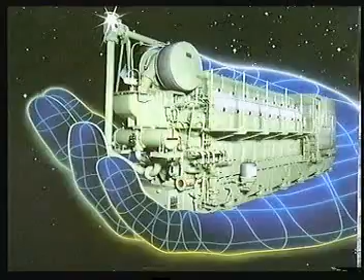This video shows how to overhaul the cylinder head, piston and cylinder liner. With regard to the dismounting and mounting of the components, please refer to the relevant instruction book or to the cylinder head, piston and cylinder liner exchange video.

This film shows how to use the tools which are available for the L28/32H type of engine.

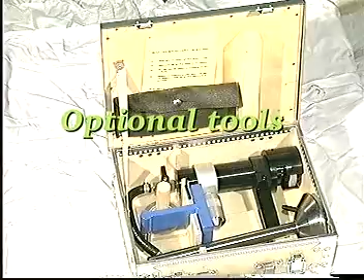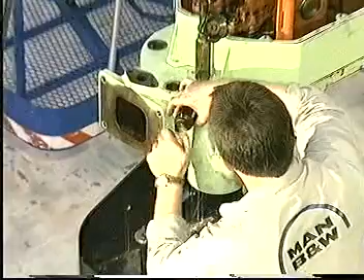Remove the scavenge air sleeve and the safety valve. For instructions regarding the overhauling of the safety valve, please see work card 605/01.25. The procedure for overhauling the indicator valve can be seen on work card 605/01.26.

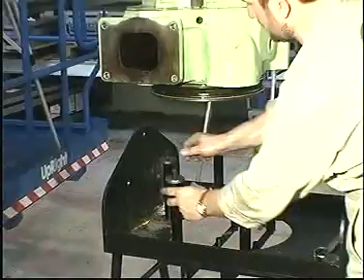Land the cylinder head on the work table. Make sure that the valve spindle supports have been mounted on the underside of the table.

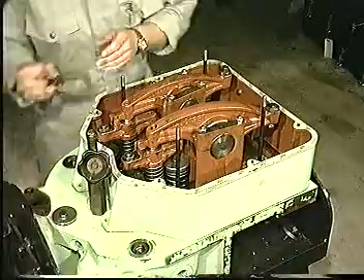Remove the cylinder head lifting tool. Screw the cylinder head firmly to the work table.

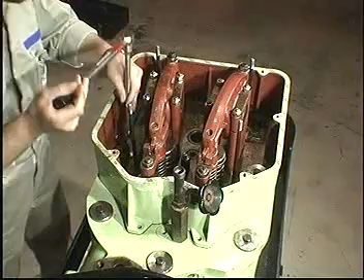Remove and discard the gasket.

Remove the valve bridges and mount the tool for compressing the valve springs above either the two inlet valves or the two exhaust valves.

Tighten the nut to compress the springs and then remove the cone rings.

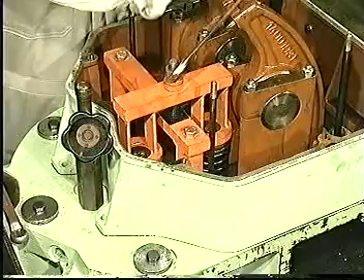Loosen the nut and remove the compressing tool. Remove the valve rotators and the springs.

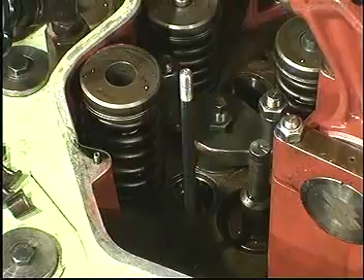For instructions regarding the inspection and overhaul of the valve rotators, see work card 605/01.15. Remove the cone rings, valve rotators and springs from the other set of valve spindles in the same way.

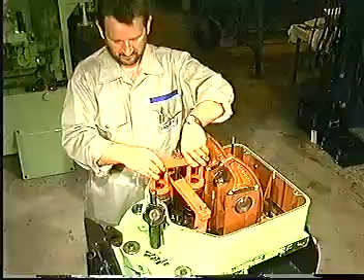Regarding the overhauling of the fuel valve, see work card 614/01.10.

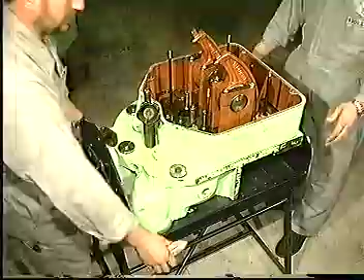Turn the cylinder head upside down and remove the valve spindle supports.

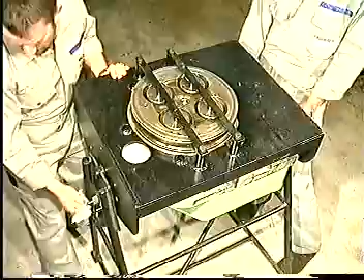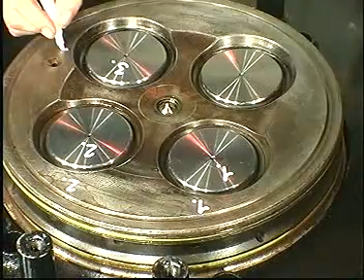To ensure that they can be rematched correctly, provide the spindles and cylinder head with numbers. Remove the valve spindles.

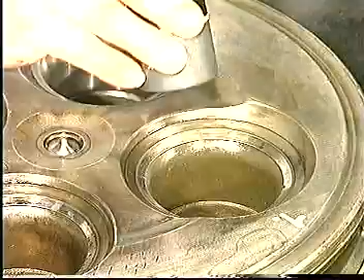Clean and check the condition of the valve seats and valve spindles. If the seats and spindles are badly burnt, recondition them. See work card 605/01.10.

Clean the valve guides with the special tool delivered with the grinding machine. Mount the grinding machine and grind the valve seats, following the instructions of the grinding machine supplier.

Grind the valve spindles in a turning lathe, following the instructions of the grinding machine supplier.

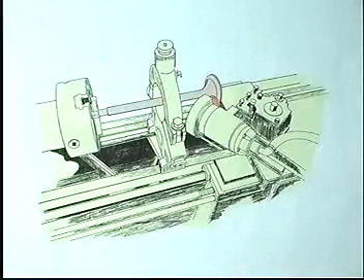Remove and discard the O-rings from the valve guides. To ensure the correct functioning of the valve guides, make sure that the diameters do not exceed the maximum limit.

Insert a valve spindle to facilitate the mounting of new O-rings. Insert new O-rings using another spindle to press the O-rings completely into the groove.

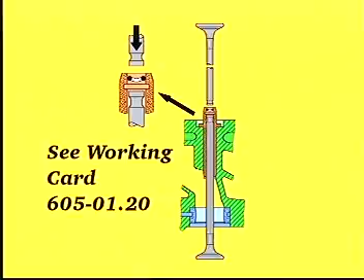Check the cooling water inlet bores and remove any deposits.

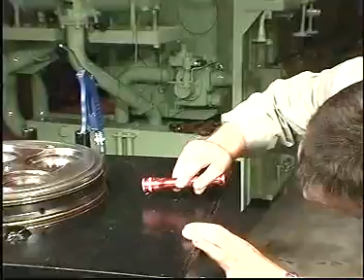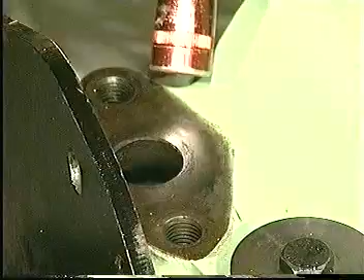Turn the cylinder head around and check the cooling water outlet. Pour water into the cooling water outlet and ensure that water flows from all the inlet bores in the bottom of the cylinder head. If necessary, clean and flush the bores.

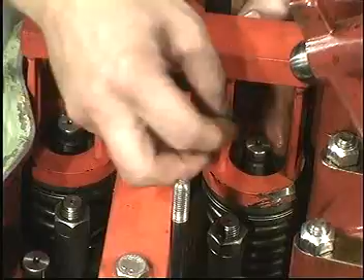Mount the inlet and exhaust valve spindles in the reverse order to the dismounting. Make sure that height H2 does not exceed the maximum limit.

Remove the valve spindle supports.

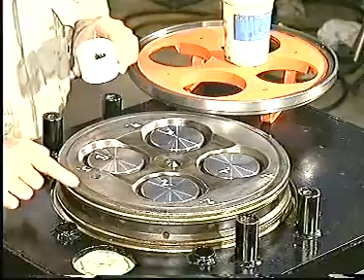Apply grinding paste to the sealing surface of the cylinder head. Move the grinding tool back and forth, lifting it from time to time so that the grinding compound is evenly distributed.

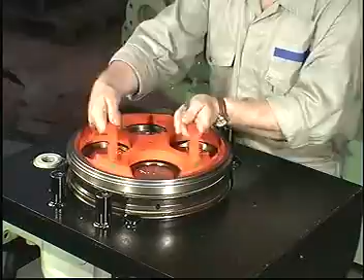After grinding, carefully clean the cylinder head. Measure and record distance Z so that it can be used for reference purposes when remounting the cylinder head.

Mount the valve bridges and remove the securing screws.

Mount the cylinder head lifting tool and lift the cylinder head.

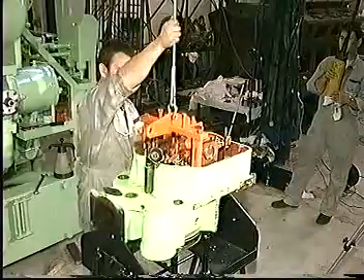Remove and discard the O-rings. Clean the O-ring grooves using emery cloth to remove any deposits.

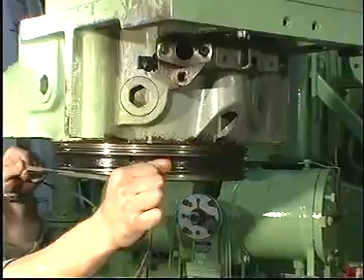Make sure that the cylinder head sealing surfaces are clean and undamaged. Lubricate new O-rings with oil and mount them in the grooves.

Lubricate the safety valve with Molykote or a similar product and screw it into the cylinder head.

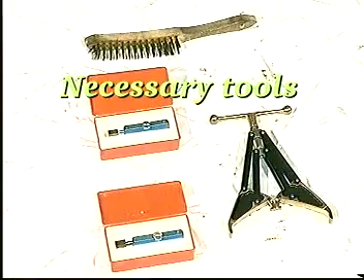Remove and discard the piston rings and the scraper ring.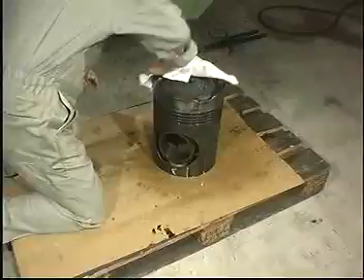Clean any deposits off the piston. It is recommended that a piece of old piston ring be used to clean the piston ring grooves.

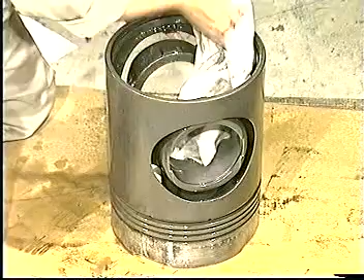Clean off any deposits from the inside of the piston. Check the piston ring grooves and scraper ring groove for wear.

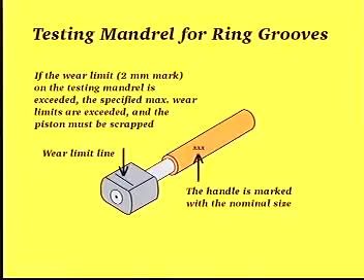The piston must be scrapped if the wear limit line on the testing mandrel is exceeded.

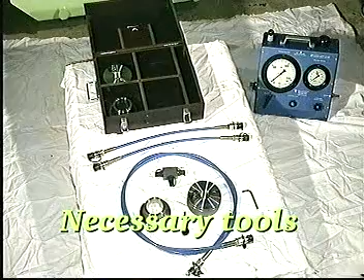Clean all machined surfaces of the connecting rod and bearing cap. Clean the serrated joint faces and threaded holes with a volatile solvent and then blow dry with compressed air.

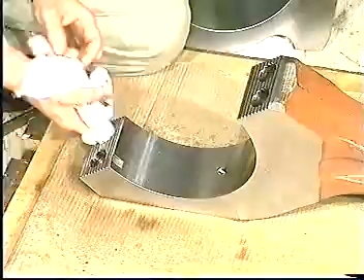Check the serrated joint faces for wear marks, pitting, cracks, etc. Refer to work card 606/01.15 for possible rectification and reuse criteria.

Enter observations in the connecting rod inspection report.

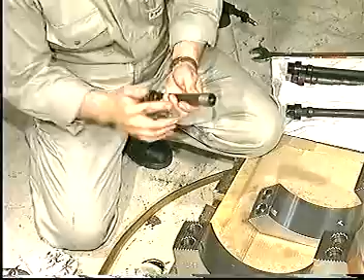Clean the threads of the screws or the studs and check them for seizures. Lubricate the threads with Molykote or a similar product and check that the screws or the studs can be screwed fully home by hand. Take great care that the lubricant does not come into contact with the joint faces of the bearing. Also check for seizures or pitting on the contact surface of the screw heads.

Assemble the bearing without bearing shells. Make sure that the identification numbers on the connecting rod and those on the bearing cap are the same. Hand tighten the bearing assembly.

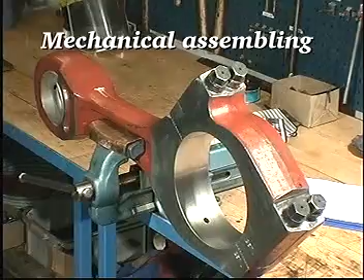The big end bearing must be tightened according to the prescribed tightening procedure before measuring the diameters.

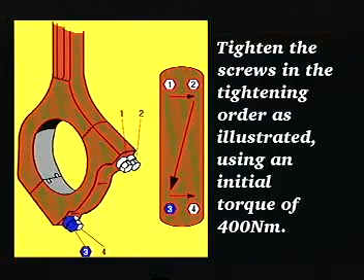Adjust the torque spanner to 400 Newton meters. Using an initial torque of 400 Newton meters, tighten the screws in the tightening sequence shown. Retighten the screws in the same tightening sequence, still using a torque of 400 Newton meters.

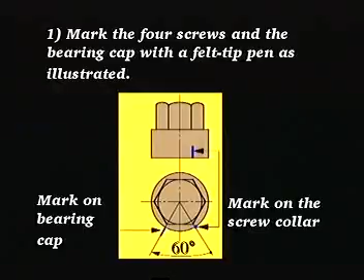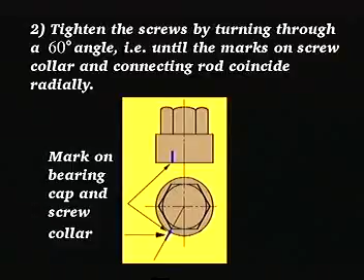Make marks on the 4 screws and the connecting rod with a felt-tipped pen. Tighten the screws in the same tightening sequence through a 60-degree angle until the marks on the screws and those on the connecting rod coincide in the radial direction.

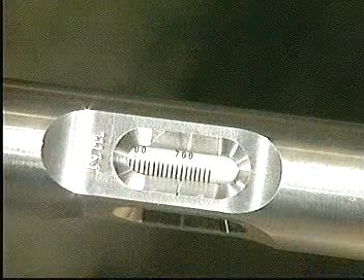Adjust the torque spanner to 700 Newton meters. Check the tightness of the screws. If the screws cannot be tightened further at this torque of 700 Newton meters, they have attained the correct tightness.

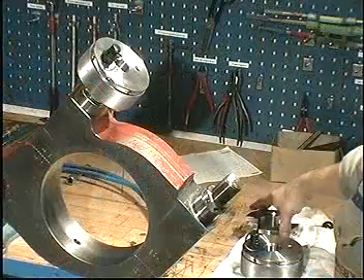The big end bearing must be tightened according to the prescribed tightening procedure before measuring the diameters. Clean all joint faces and mount the hydraulic tools. Make sure that all the parts engage correctly.

Connect the hydraulic tools to the high pressure pump. Vent the system if necessary and increase the oil pressure to the prescribed value.

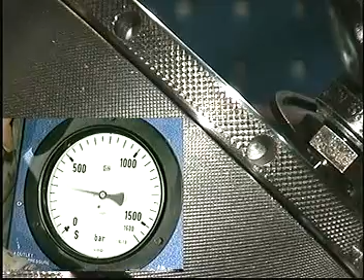Tighten the nuts with a tommy bar.

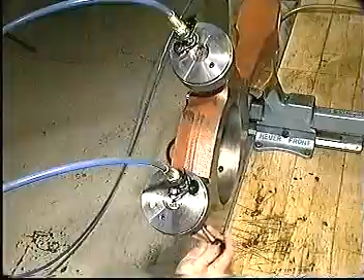Relieve the system of pressure and remove the hydraulic tools.

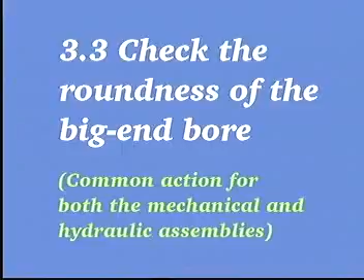Mark the 5 positions, A to E, at which the diameters of the bearing bore are to be measured.

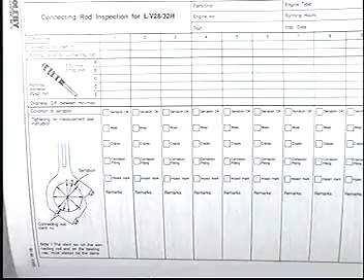Measure the diameters in the middle of the bore and note down the result in the connecting rod inspection report. The maximum ovalness is defined as being the difference between the largest and smallest diameter measurement. Please refer to page 600.35 for maximum allowable ovalness values.

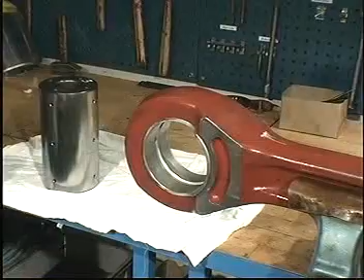Clean and inspect the surfaces of the piston pin and the connecting rod bushing.

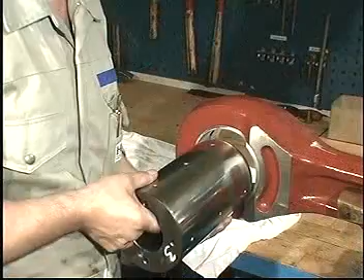Insert the piston pin and measure the clearance between piston pin and connecting rod bushing. The maximum allowable clearance values are given in page 600.35.

Loosen the big end bearing assembly and then hand tighten it.

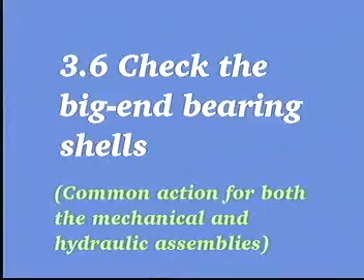Inspect the big end bearing shells through the magnifying tool. For help in evaluating bearing conditions, please refer to work card 606/01.16.

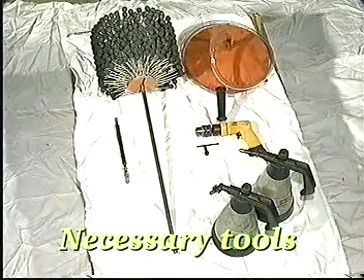Mark the positions in the longitudinal as well as in the transverse directions at which the diameters of the cylinder liner are to be measured.

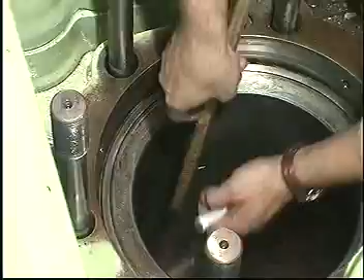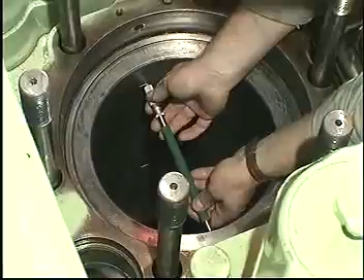Make sure that the measuring tool has approximately the same temperature as the cylinder liner. Measure the diameters in the longitudinal as well as in the transverse directions and enter the results in the measurement of cylinder liner report. Please refer to page 600.35 for information regarding permissible cylinder liner wear values.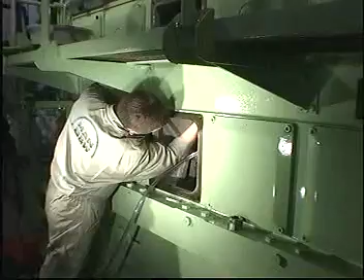If the liner is designed to hold a flame ring, remove the flame ring before honing the liner. Mount the tool for holding down the cylinder liner and remove any deposits or wear ridges from the upper part of the liner. Fit the drain funnel to the low end of the liner to prevent contamination of the crankcase during honing.

Lubricate the honing tool and the liner with honing oil or cutting oil.

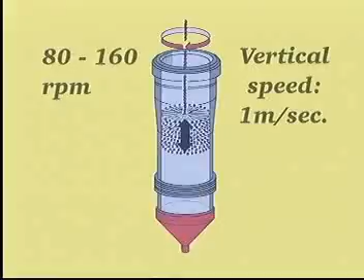Adjust the speed of rotation to 80 to 160 RPM. Use a vertical speed of about 1 meter per second to achieve the required angle between the honing grooves. During honing, lubricate freely with honing oil or cutting oil.

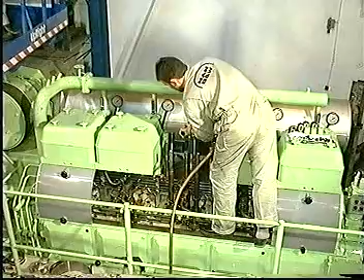Continue the honing until the cylinder wall is covered by honing grooves and has a slightly matte appearance without sign of glaze.

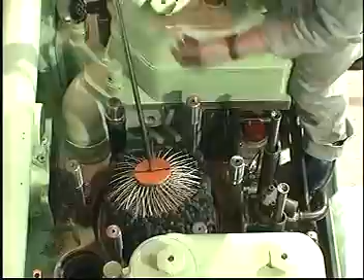Clean the cylinder liner carefully and remove the tool for holding down the cylinder liner.

If the liner is designed to hold a flame ring, clean and install a new flame ring.

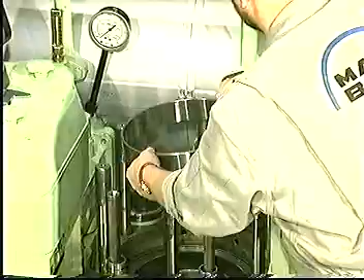Remove and discard the old sealing ring at the top of the cylinder liner.

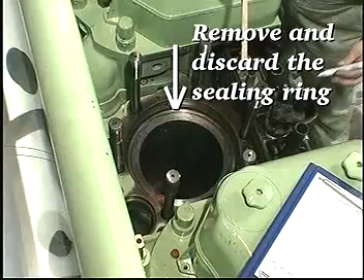Apply grinding paste to the grinding tool. Move the grinding tool back and forth, lifting it from time to time to allow the even distribution of the grinding compound.

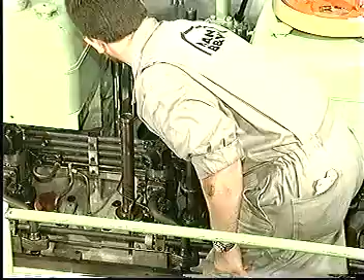After grinding, clean the cylinder liner carefully and mount a new sealing ring. Remove the drain funnel.

Measure and record distance Y. Please refer to measurement Z, which was recorded during the overhaul of the cylinder head. To ensure that the sealing between the cylinder head and the liner is correct, Y minus Z must be more than 0.5 mm.